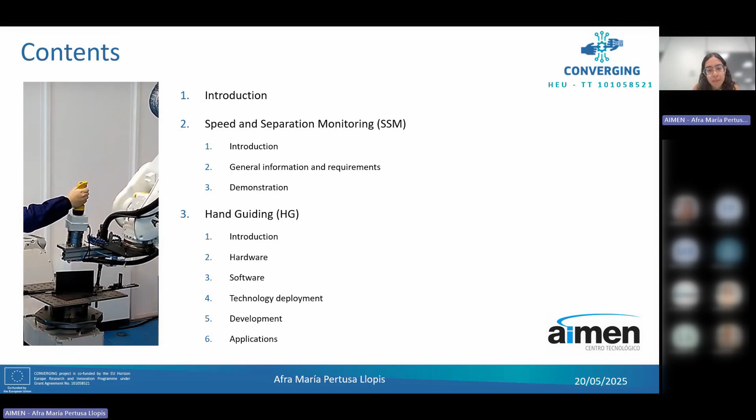Here you can see the pilot factory, which is an open space that we have here at AIMEN. It is an environment that has real components. Right now we have naval components, and we are also integrating an open work cell to work with the operators, as shown in this picture. These spaces and this infrastructure are quite useful for us to test developments before going to the final user or the industry, because we can replicate the conditions found there.

As we work with sectors that are quite difficult to access, like the naval industry, because of their production times, we can test things here before going there. So we ensure that the systems will work.

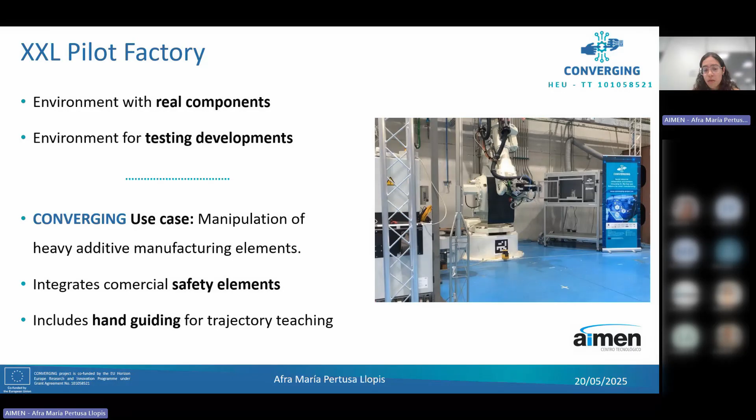Here in CONVERGING, we are using the open space cell focused on the manipulation of heavy additive manufacturing elements. Here we are applying safety components and also the hand guiding system. It's a bit different from what we are going to present, because the safety elements here are commercial ones, and the hand guiding is a solution another partner developed. Now we are going to focus on another kind of solution developed here at AIMEN, with the same purpose: to ensure safety and safe interaction with the operator.

Now, at AIMEN, we have developed a hand guiding system and also some safety systems that we are going to cover. But first, as we are talking about safety, we have to take into account the certifications associated with that. The first one is the ISO TS 15066.

That is the one for robots and robotic devices and collaborative robots, and the safety interaction between the human and the robot in a shared space. This normative defines 4 modes of working that you can see here in the picture.

Level 1 is the safety rated monitored stop. Here, when the operator enters the area, the system will stop. The second mode is hand guiding, where the operator can directly contact the robot and move it in the direction the operator wants.

The third level is speed and separation monitoring. Here we monitor the distance between the operator and the robot. We can use different techniques to do that, and we will work in normal mode, reduced mode, or stop the robot. The last mode defined is power and force limiting.

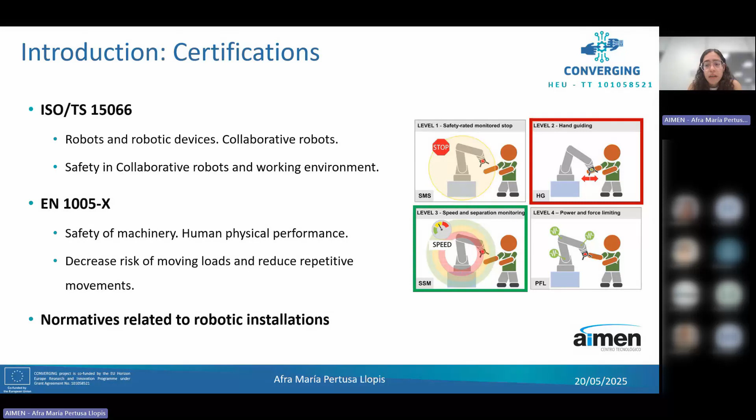And then we also have associated generic robotic installation certifications on electrics, electronics, and this kind of thing.

Now we can move into one of the modes I presented before: speed and separation monitoring, or SSM. This solution is a safety system that works in open space. We have real-time control of the speed of the robot. So what we are doing is monitoring the distance between the operator and the robot, and depending on this distance and also the speed of the robot, we can control and modify the speed of the system.

With that, we define 3 modes: stop mode, reduce mode, and normal functioning. How can we do that? We can apply different types of technologies. We can use laser scanners, as you can see here from Pilz.

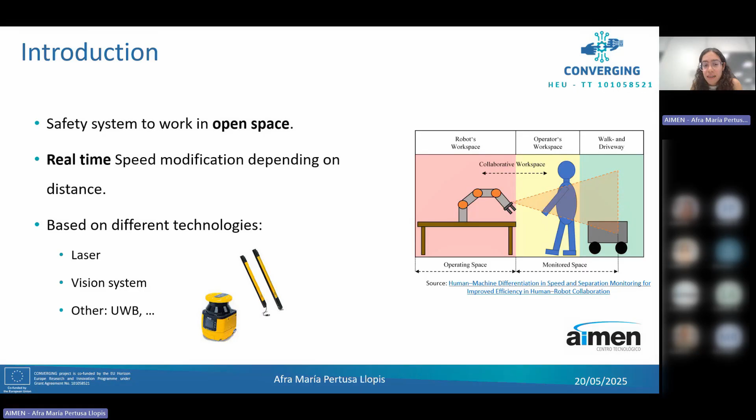We can also apply ultra-wide bands or vision system. The selection of the system will depend on if we have some occlusions or another type of component. Depends on the lighting or what we can install and we have to monitor.

And now this is the solution that we have here at AIMEN. Then we will see a video of this system working. We are monitoring the people in the space with some camera visions and with artificial intelligence, and also a traditional vision like the OpenCV and the YOLO. We are obtaining the pose of the person. Here in this picture, you can see the skeleton of the person.

And with that, we elaborate the digital twin of the person. And we do the same with the robot. We are extracting the positions and then elaborating the digital twin. So with that, by software, we compute the distance between the 2 elements of the scenario. And depending on this distance, we send the command to the robot.

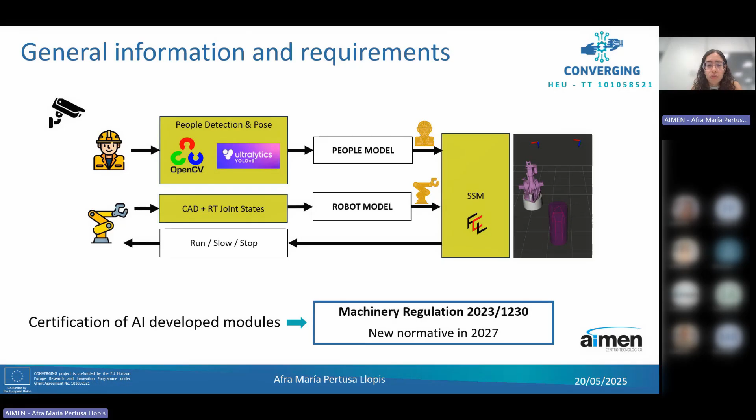And this is now not regulated, but we have to check how to do that, because now in 2027, a new machinery regulation will appear that covers all the part of the AI modules. Right now, the AI modules are not being regulated, so they are working on that.

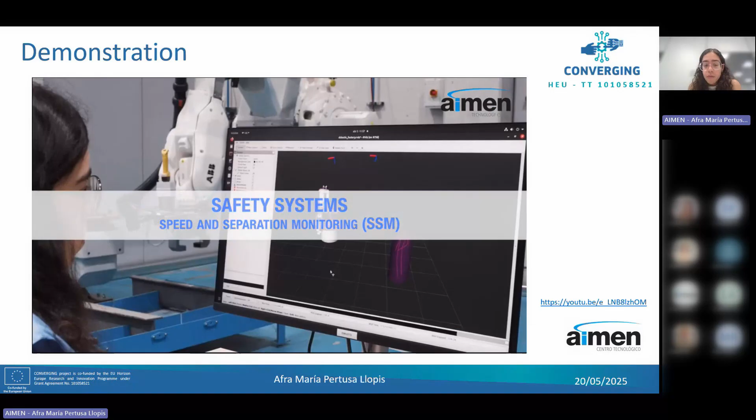Okay, and now we can see the first video here. We can see the video of the SSM. We have here the robot performing an automatic task. Here you can see that we are obtaining the digital model of the cell with the camera systems and also with the driver with the robot.

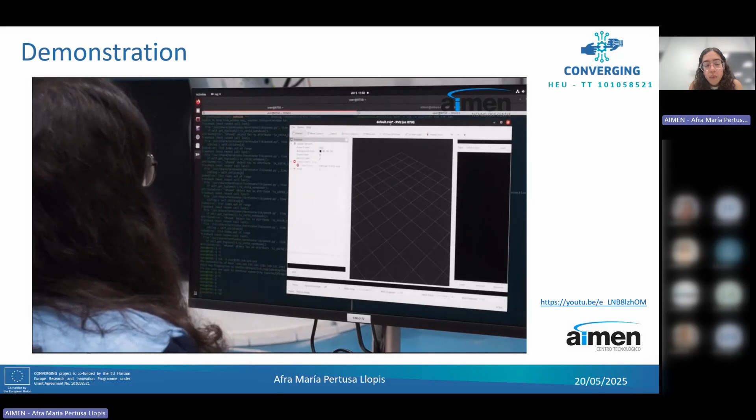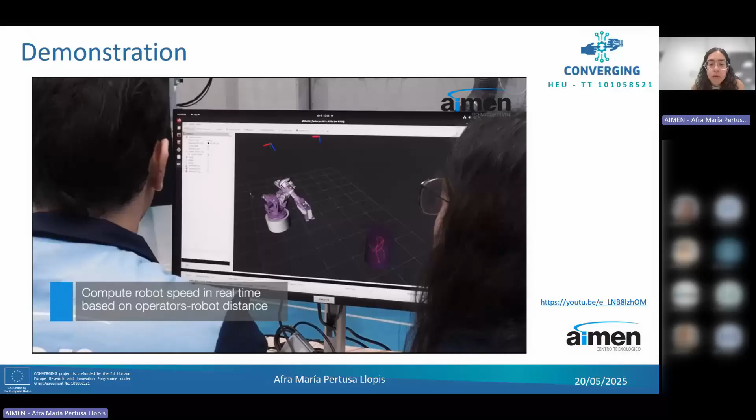So with that, you can see now how the operator will approach the robot, and the robot will stop. And when the operator leaves the area, the robot will go to normal mode again. So here you have seen how the robot was in normal speed, it reduced it, and now it is stopped.

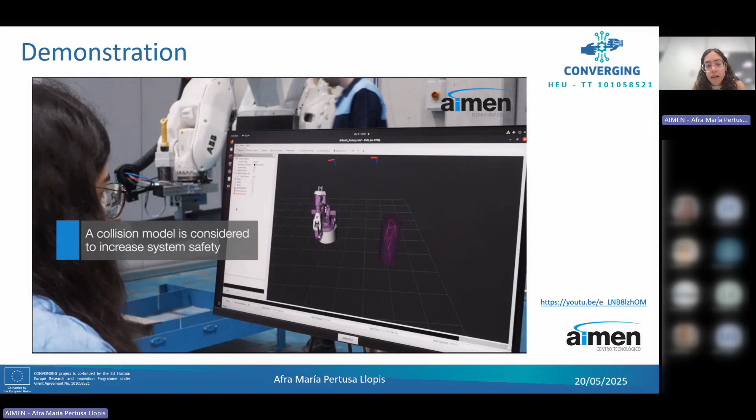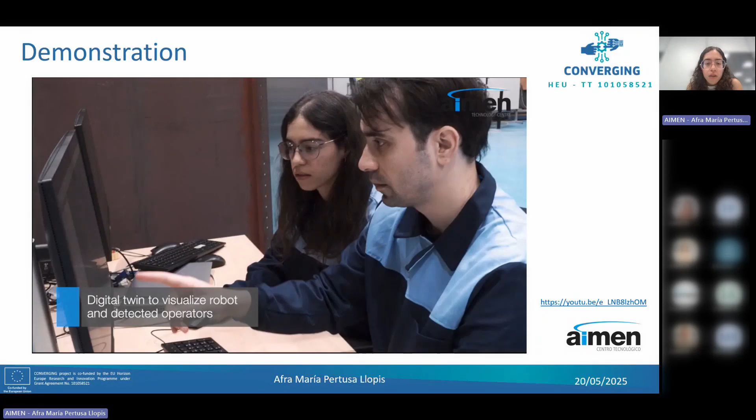So we are having this system, and the benefit of using this system is that you don't have to put the system into an emergency stop or similar. So you ensure that all the system is working all the time and you're not stopping the production.

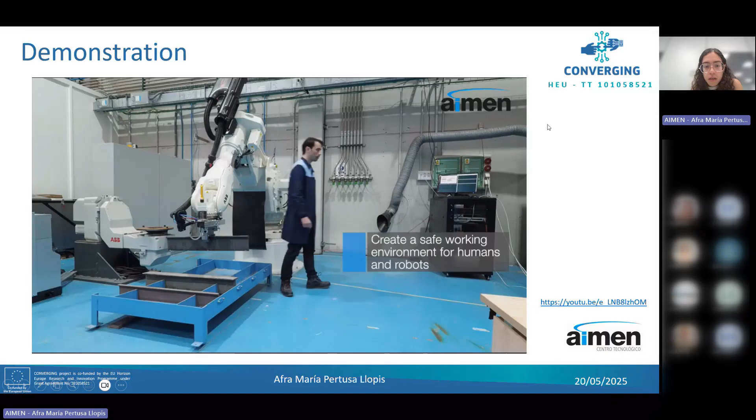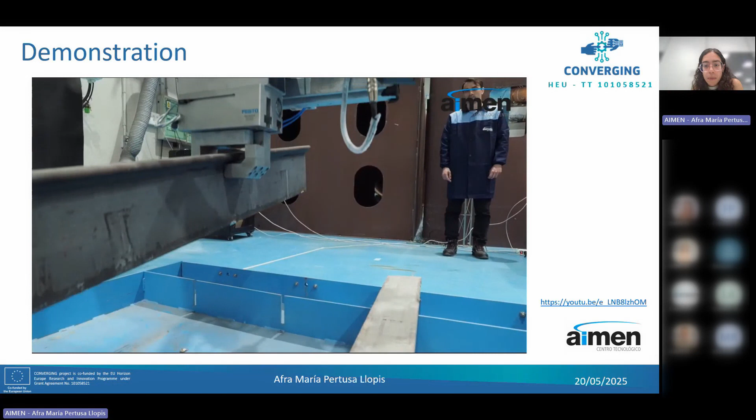Now you see how the operator leaves, and the robot will start moving again. Now it reduced, and now a normal speed. So this is the way we work with the SSM.

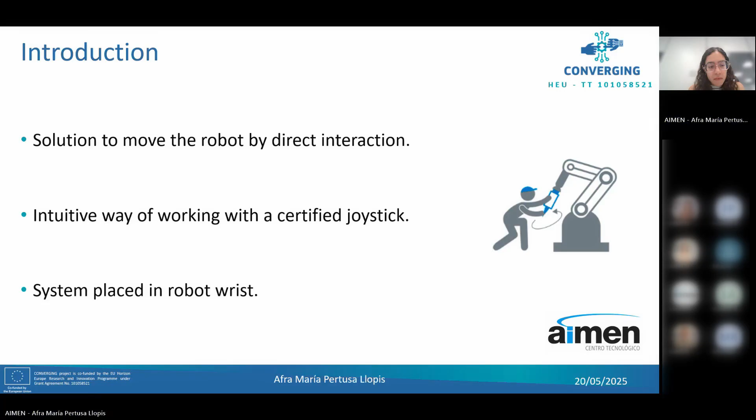And now we can move into the hand guiding, that was another mode of the ISO that I commented before. This solution is applied to move the robot by directly applying force on the end effector. We have a joystick integrated on it, so the operator can grasp it and apply the efforts into the direction of movement that he wants. And this is an intuitive way to work.

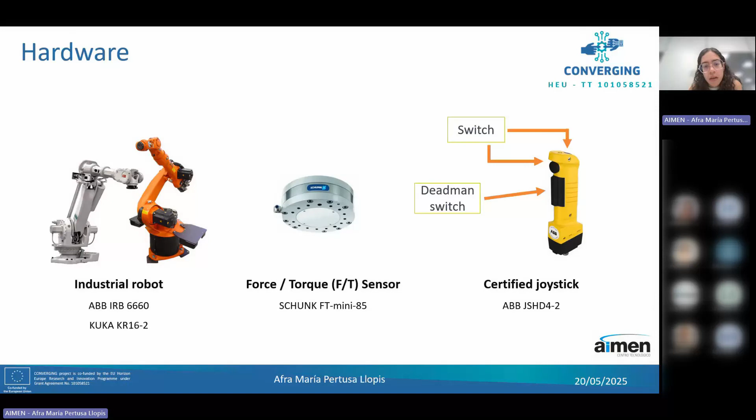And then on the software side, we have a hand-guiding module that computes the command to send to the robot based on the force and the robot position. So here we require high-speed communication with the robot, around 250 Hertz. And this is critical because we are doing real-time control, so we need to send information quickly to the robot, because if not, we will not have the expected behavior of the robot.

So now, once we have all the software and all the hardware, we need to do previous steps like the calibration and configurations to be able to deploy this technology. So the first one is the Denavit-Hartenberg parameters. I don't know if you are familiar with this type of nomenclature of the robots, but this is a simplified way to represent the robot kinematics.

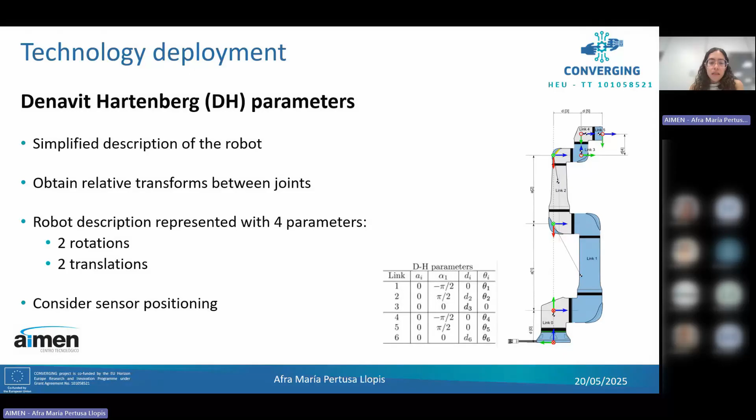So we have some restrictions when defining the reference systems. For example, you have to put the Z axis in the direction of movement of the joint and these kinds of things. And with that, you compute the transformation between one joint and another one. So the result is that with 4 parameters, we represent this transformation. So it is quite optimal in computing, and it is quite easy to use.

Then we have to define also in which position we have placed the sensor. Now we are defining it with respect to the TCP, and we have also to define the application point. This step is also crucial because if you program badly the application point, the robot will not move correctly, because we cannot translate correctly the information of the applied effort.

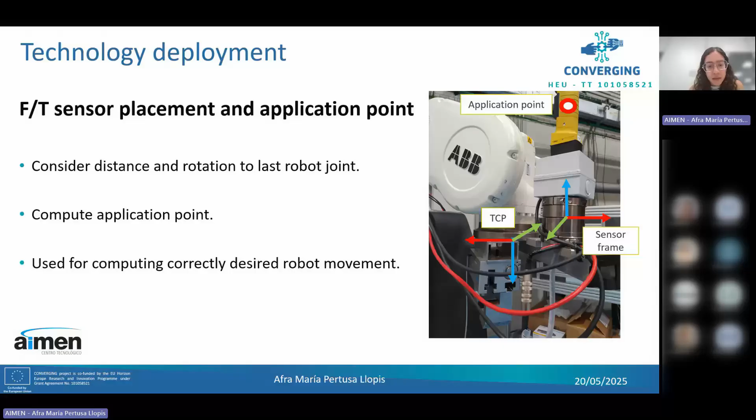The next step will be the sensor calibration. This step is also necessary to know at all times which is the constant effort that is applied to the sensor and to the system. So with that, we can ignore this constant effort, and then we only read the effort applied to the robot. So for doing this calibration, we have to align each axis of the sensor in both directions, in the positive and negative direction, with the gravity vector. So with that, we measure this effort.

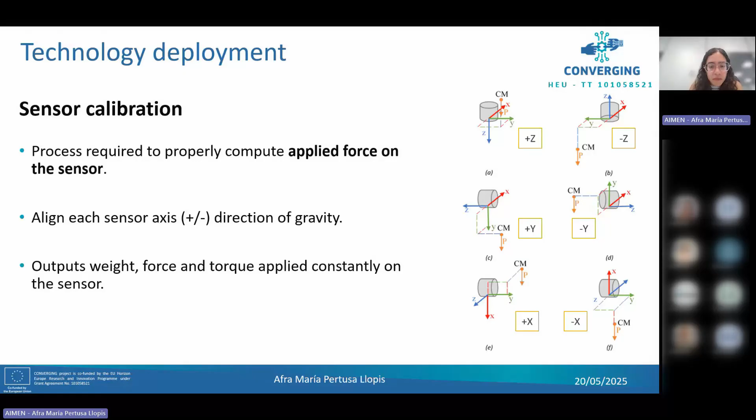And the last step is to adjust the controller response. Here, the aim is to find the parameters that make the system move softly. We can adjust 3 parameters. One is the weight of the force and torque values, that is like a proportional value. We can adjust also the system inertia, and this will affect the start and finish of the movement, which means that it's not hard to start moving the robot, but when you release the force, the robot will stop and will not have this inertia to continue with the movement.

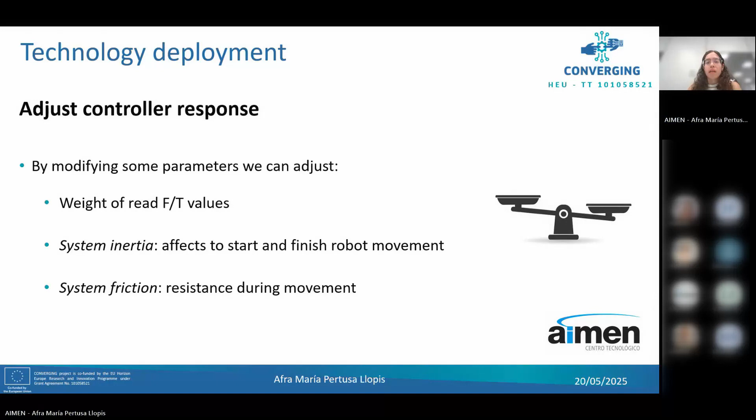And the last point is the system friction, that is the resistance that we apply during the movement. So with these 3 parameters, we have to find the balance between all of them to find the desired movement for the robot, in a way that it is not difficult to start moving it, but you can have enough control of the system.

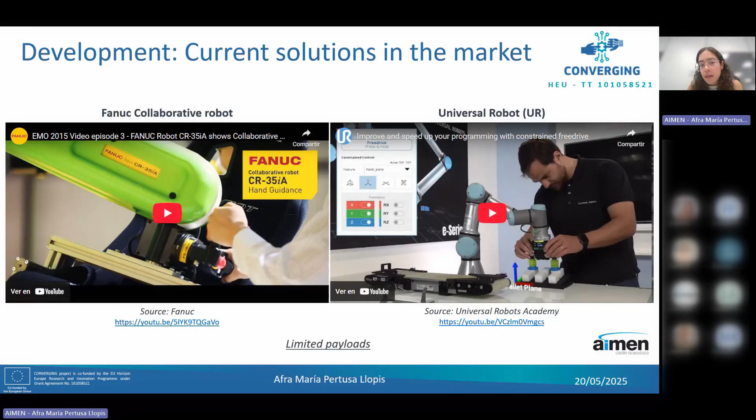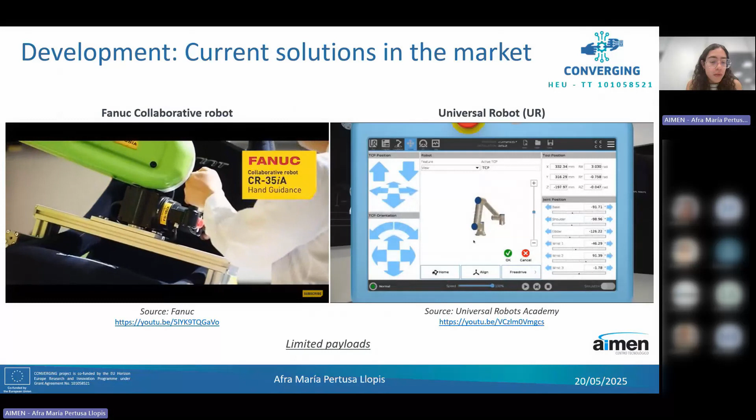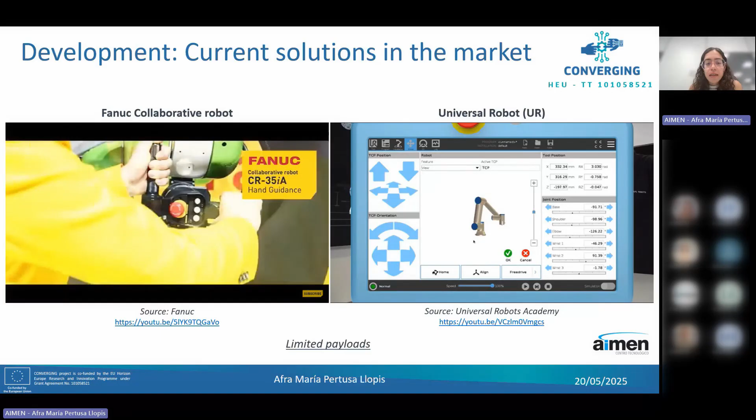And now, before going to our solution, I want to show you the current solutions that are already in the market, which are all based on collaborative robots. Here you can see the one for the FANUC robot and also for the UR robot. You can see that in the FANUC, the operator needs 2 hands to move the robot. It is like a plugin that you put on the robot wrist. And in the UR, it is already implemented, and you can limit the axes of movement. You can block some rotations or some translations. And these are the commercial solutions that we have.

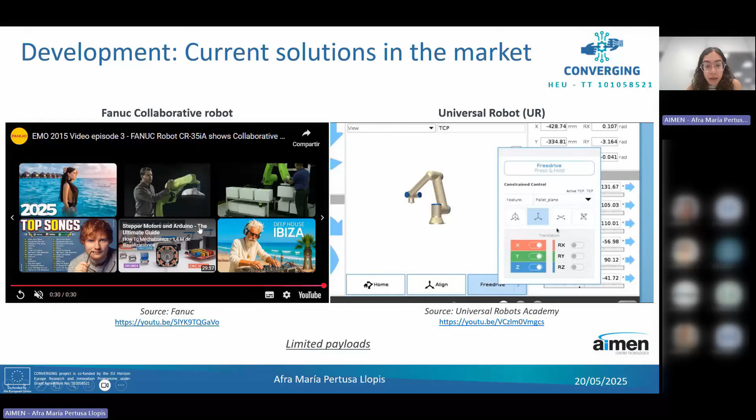The problem when applying this is that we are using collaborative robots. We are not going to work at high speeds, and we can't move high payloads, because I think now the collaborative robots are around maximum 30-40 kilograms of payload. So in our case, the naval industry, they are not applicable, because we are working with really heavy components. So here you can see the commercial solutions for hand guiding. And now we can move into our solution.

We have developed it for ABB, KUKA and COMAU robots. The main difference here is the way that we command it. In both systems, we read the applied force and we transform it into the robot commands. So in the ABB, we are directly sending the velocity that we extract from the controller. And in the KUKA and COMAU, we need an additional step, that is transforming it to position. And here we have seen that we need to apply some filtering techniques to have a smooth response. But in both ways, we are using the real-time control, all the capabilities that the robot has, and the communication protocols.

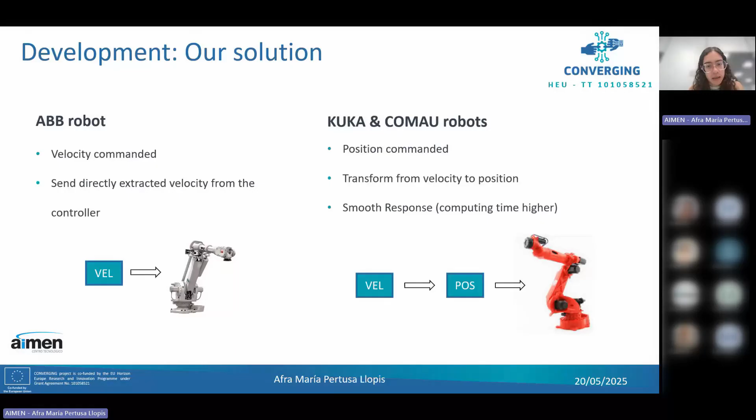Okay, and now the applications that we are using here. It has more applications, but these are the 2 that we focus on. The first one is load handling. We can move known loads and unknown loads. In the first case, we directly put the sensor on the robot wrist. And here we can only move known loads, because if you apply an unknown element, the calibration will be affected. So we can only work with this type of component.

And just to remark that this application can also be useful to detect if you have grasped an object or not, because you know that, for example, you pick some component and then you see that the force that you're seeing is decreasing. So you know that there is some slipping and you're losing the object. So this is another thing that we can apply it for.

And the second application is for unknown loads, that we integrate directly the joystick with the sensor. So we only read the effort applied by the operator. So it is a more flexible solution.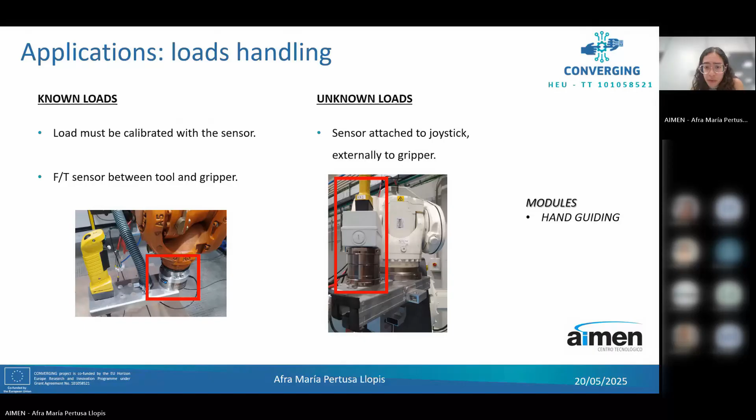And the second application is the trajectory programming. We have here integrated the general purpose buttons and also the deadman switch. The deadman switch is for safety and to avoid the operator having to be all the time grasping the teach pendant.

Then the general purpose buttons are one for modifying the accuracy. With that, we modify the robot speed, so we have more controlled movement of the robot, or the robot will go faster, so we can have precise, more accurate movements, and also a general movement. And the other button is used to store the trajectory points.

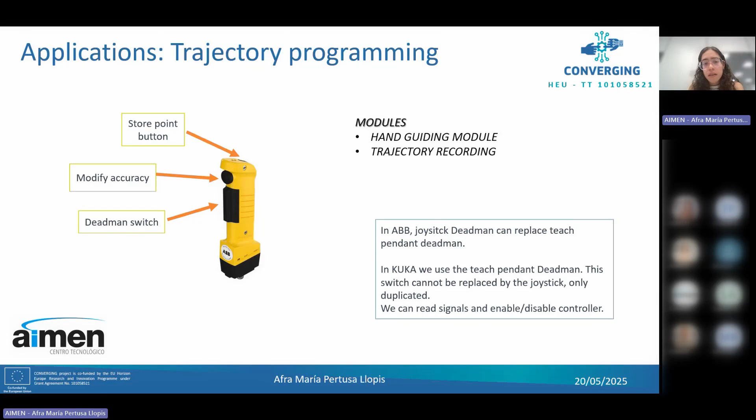Here we are also applying a graphical user interface to be more accessible for the operators, because with this solution of programming trajectories, the aim is that an operator with no knowledge in robotics can use a robot and program a robot. So for this reason, we provide a graphical user interface.

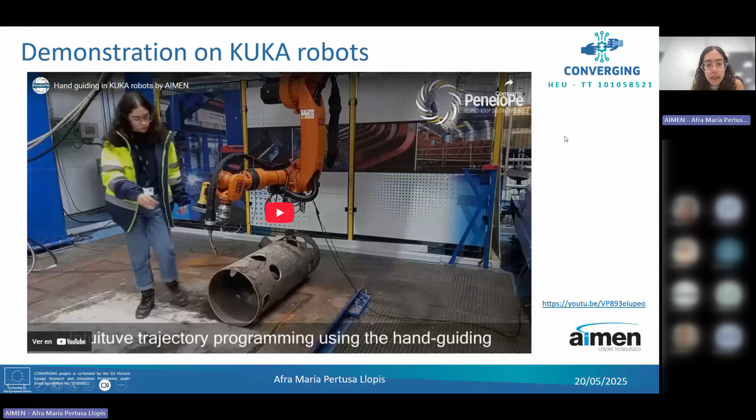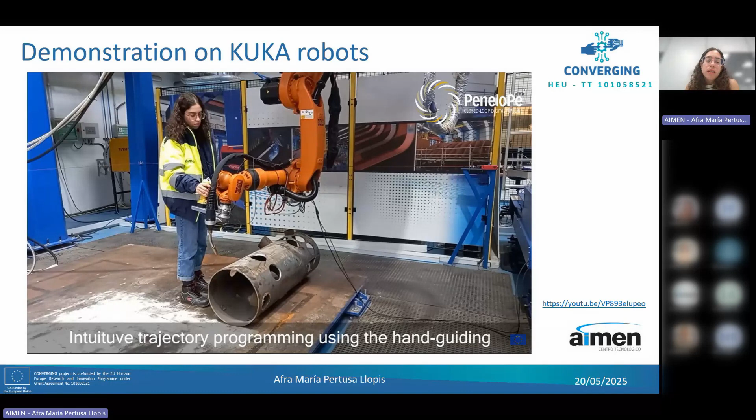So this is a video of the application of the trajectory programming. You can see here how the operator is moving the robot with the joystick and also the deadman button, and we are pressing the store trajectory button, and we are storing, in that case, 3 points to perform an arc trajectory. So once we have all the trajectory stored, by using the graphical user interface, the robot is able to perform the whole trajectory that the operator wanted.

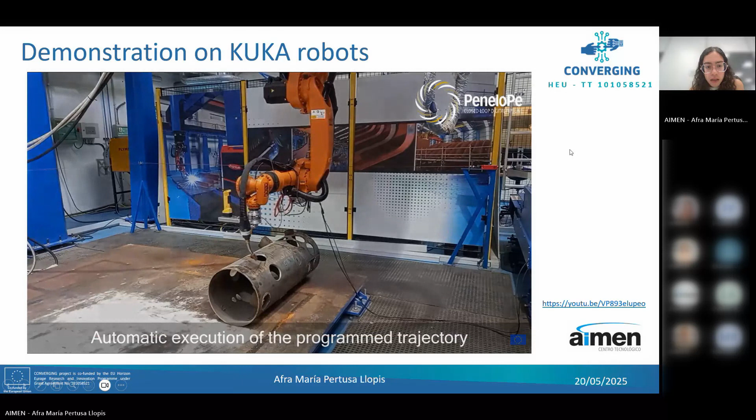So now we are doing some simulation of welding, but different applications can be used, because finally you have a gripper. If you change the gripper, you can cover a lot of aspects. So with that, this is the first video, and the second one is more or less in the same way.

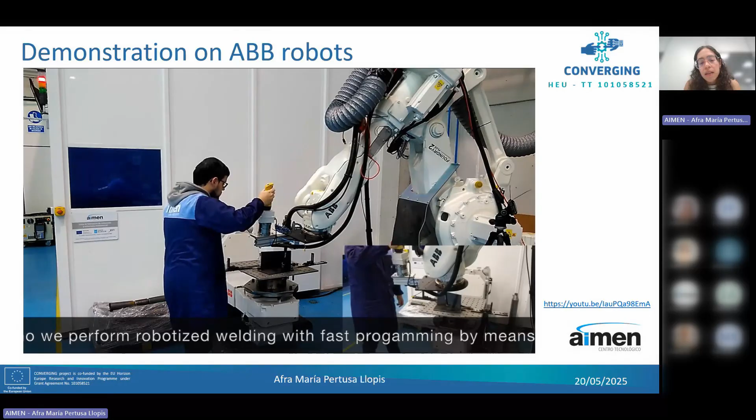Here we have the operator that is programming different points of the trajectory. You also have here a close view of the system, and it is programming a welding application also. So the objective here is that an operator that doesn't know how to manipulate a robot can really use it and program the points. So no knowledge is needed for doing that, only to know how to use the hand guiding technology.

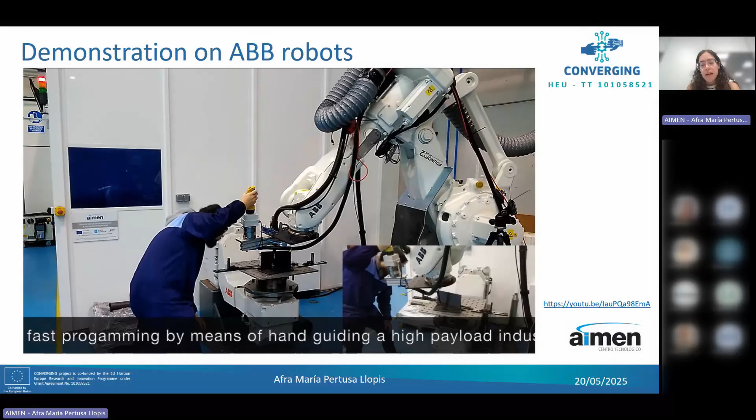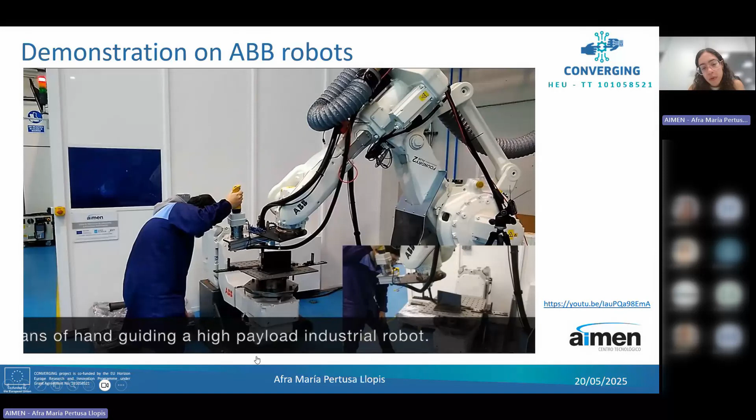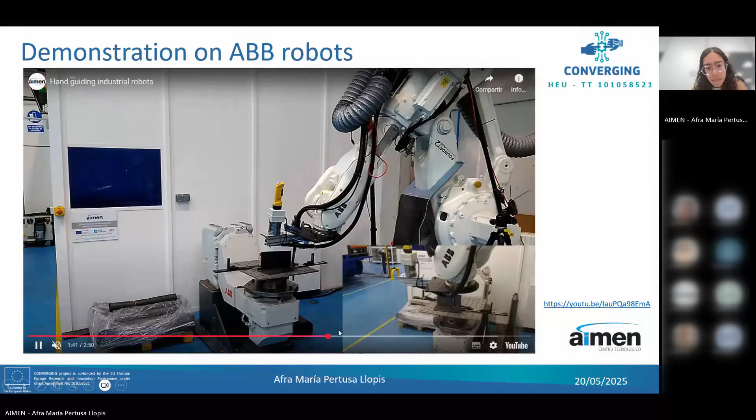Okay, so now here the operator has performed all the trajectory and stored all the points. Here, more points are defined in that case. And now the robot is performing a welding operation. So this is a different type of application, but based on the same modules and the same ideas, programming trajectories or different things. And for example, here, if we have a gripper, we can grasp the element with the hand guiding, so we can move the different loads.

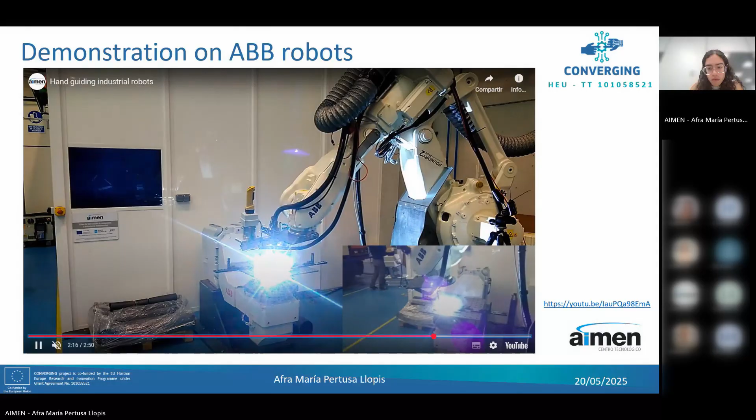In aeronautics, instead of welding, we can do some gluing, or we can use it for inspection in the way that the operator can move the robot to the area of interest and then take some capture or similar to detect the components. Also for disassembly, it can be the application of moving loads.

And just another thing that we have seen is in the automotive sector, we can use the hand guiding for safety purposes. For example, if a robot is stuck in some difficult position, then the operator can go and with the hand guiding move it and put it into the safe position to continue with the automatic program. So we have seen these kinds of applications.